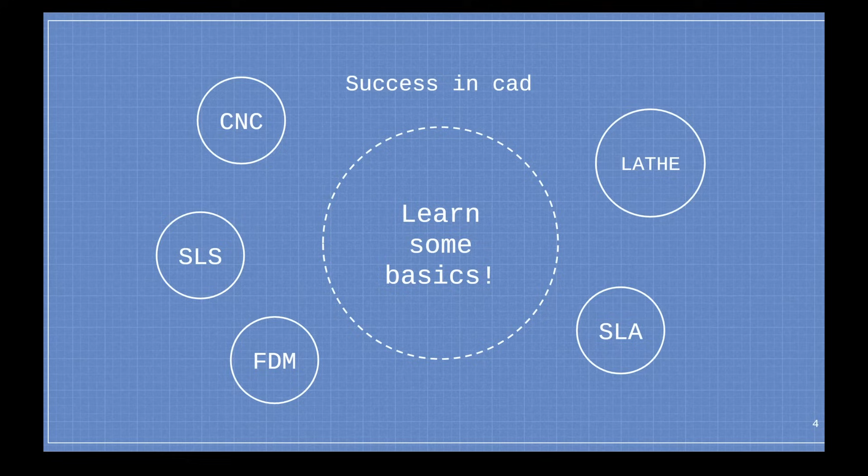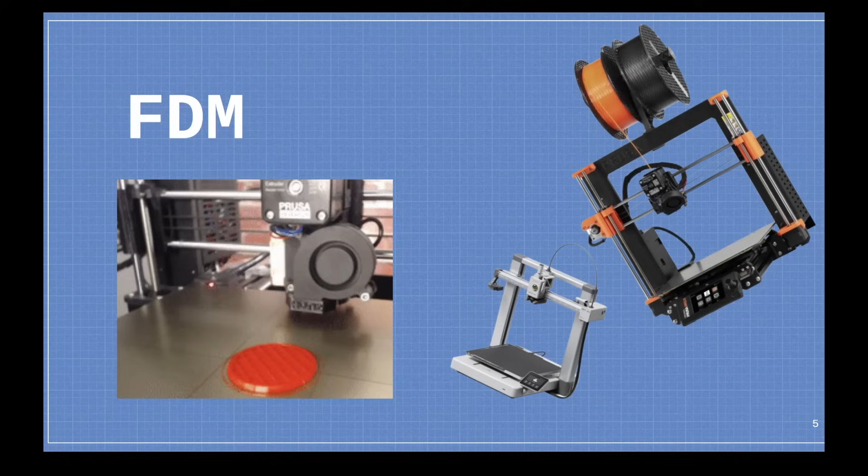However, there are better manufacturing ways if you're planning to mass produce. For FDM, this is your standard Prusa or Bambu Lab, and it just has a layer by layer way of making a part, and the main constraint is that you can't print with an angle less than 30 degrees.

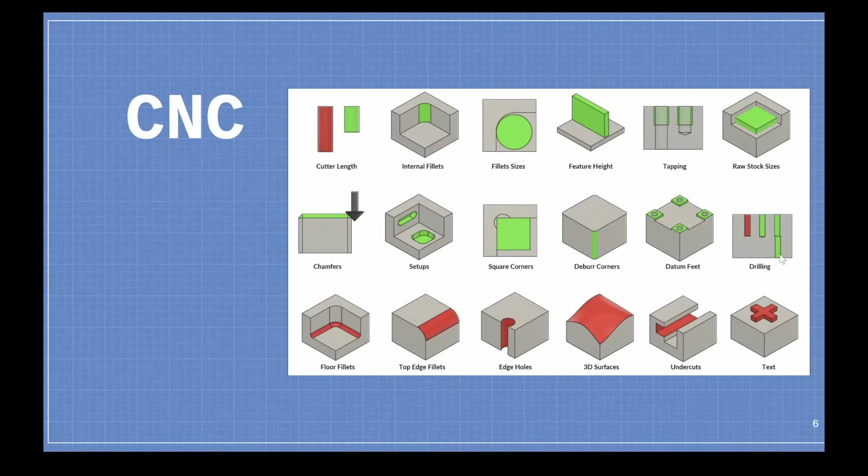Then we have CNC machining, where the main constraints are related to the tool, since in CNC machining you are removing material instead of adding material. Therefore it's very hard to make text, undercuts, 3D surfaces, and fillets. It's also important to know that in CNC machining you can't create a perfectly square corner, since the tool is a drill bit and it's circular.

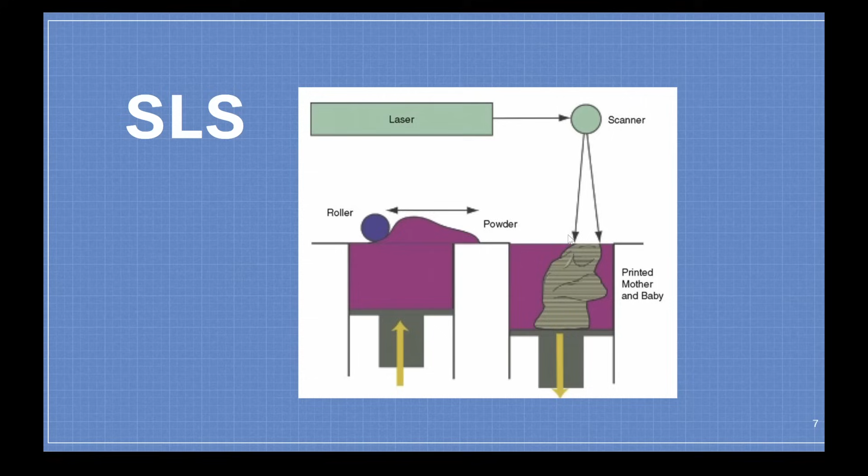Then we have SLS, which is just melting some very fine powder with a laser, and this allows you to print many objects without thinking about support material.

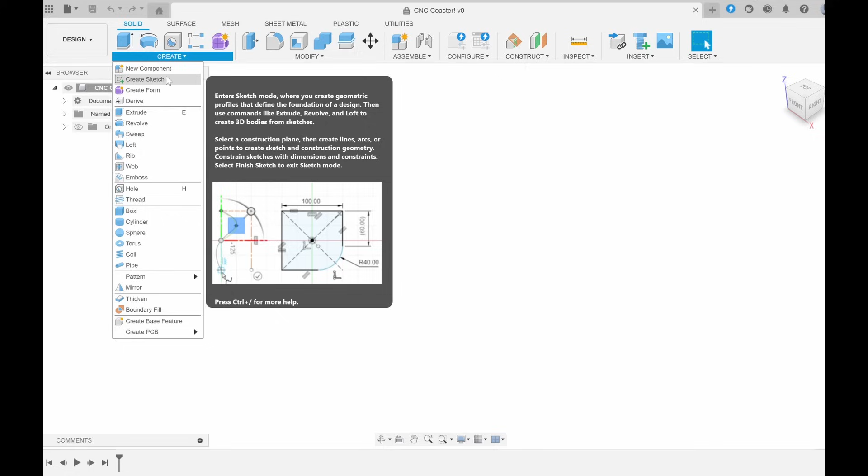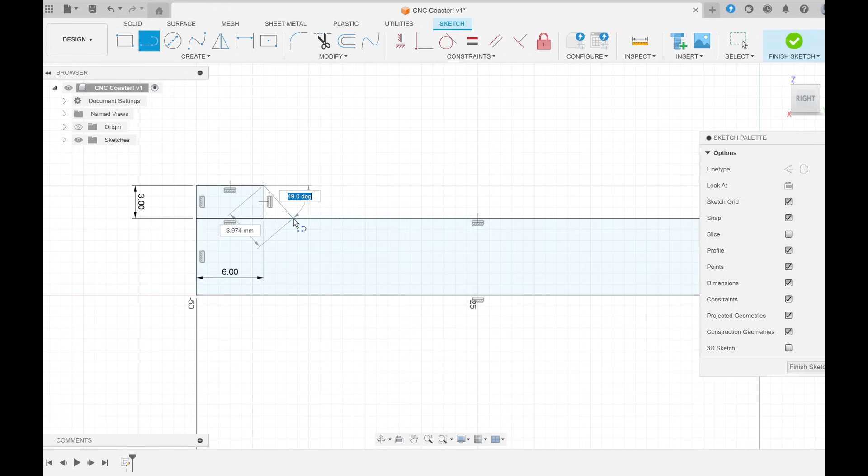So first let's start by just creating a sketch, and in this case, since we're revolving a part, let's make it in the Z plane. Now imagine you're trying to revolve a cylinder. To do that, you just take a rectangle and then revolve it around one of its ends. So let's make a rectangle with some dimensions, and then add that small lip at the end. In this case, I'm just approximating dimensions, but since it's a part with no functional constraints, you can just guess them.

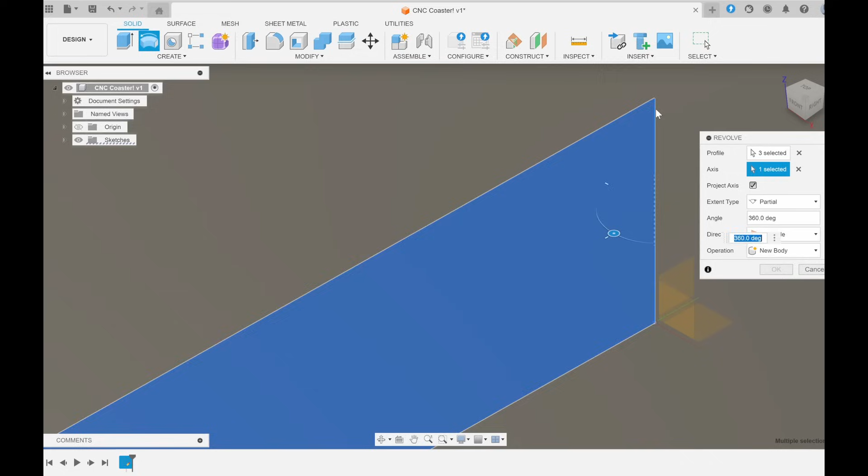And now let's get the revolve feature. Select the sketched parts and then select the axis, which in this case is just the Z plane. And now we have a pretty nice cylinder to start with.

Okay, so now let's add a logo, maybe the open source logo, since it's pretty important in the 3D printing community. In this case, to import a canvas into Fusion 360, I would highly recommend making it without a background, so I'm using an online tool to remove the background.

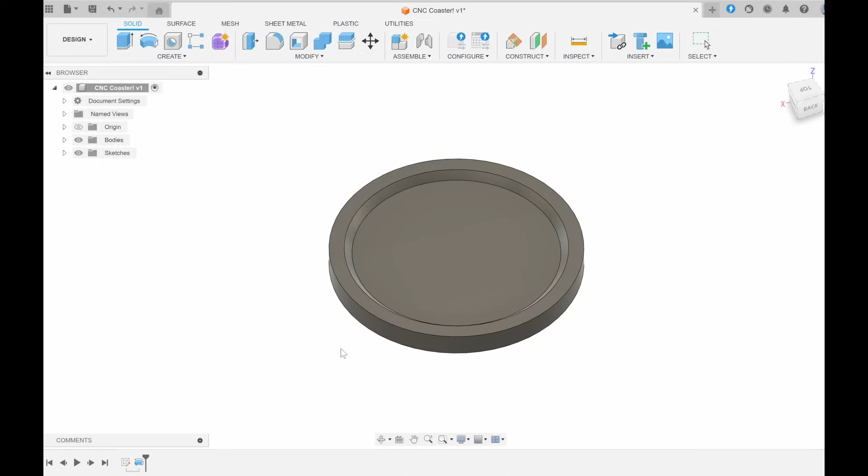Then you can just import it and select a plane. In this case, it's just the top plane, and then we can move the canvas and also scale it. So maybe let's try to center it a bit, and then make it a bit smaller. That looks good.

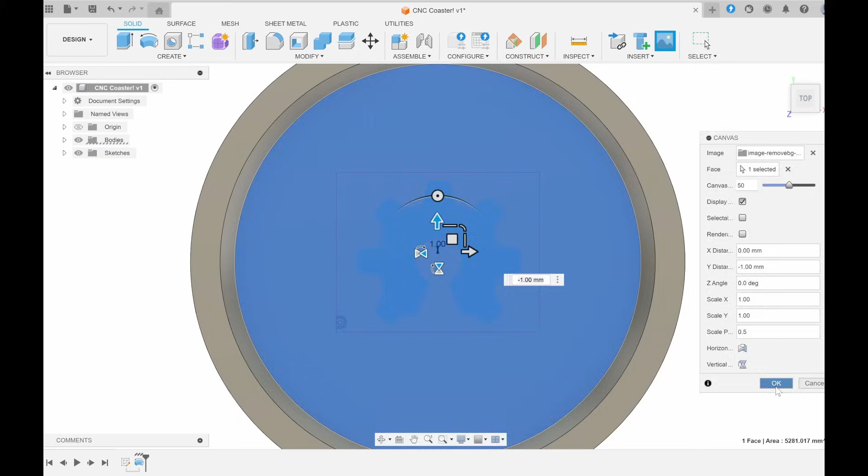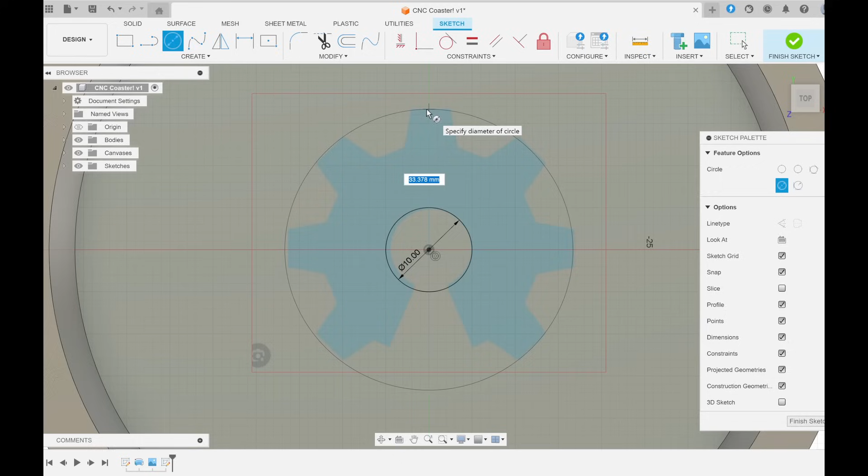Now we have to make a sketch and actually trace the canvas. If this was an SVG file, we could have just extruded it directly, but in many cases SVG files are not very clean, so it's much better to import a canvas and trace it over.

So let's make two circles, which are the boundaries for the logo, then another circle which is just the final boundary, and then we make two lines for the gears.

As we see in this part, there is some symmetry and also some rotational symmetry. So whenever you're trying to trace a logo or a canvas in general, you should try to use the symmetries of the part. This just makes your traced part much more similar to the original one. You can always try to free draw it, but it will never look as good.

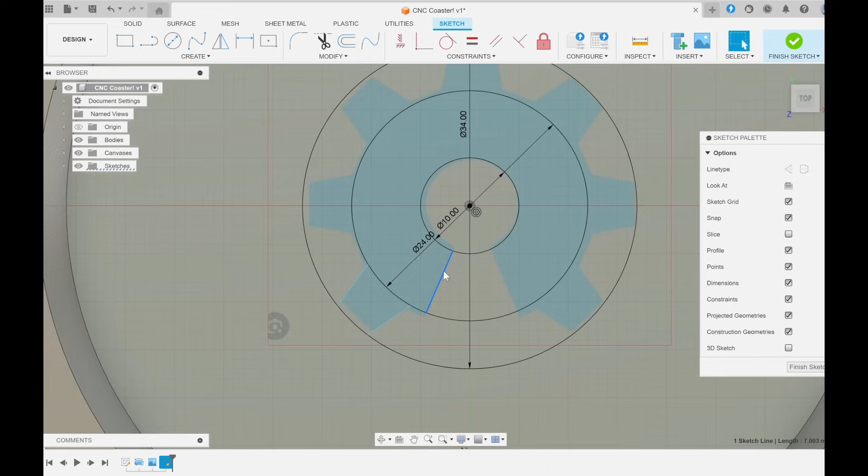So in this case, we can mirror this line here, since it will be the same on the other side. So just select the mirror tool, and the origin as the axis.

And then we see that there is rotational symmetry for the gears. So we just select the two lines, a center point. And then in this case, I see that there are, I think, 7 gears, but it's not full, it's partial, so you have to select an angle. In this case, might be 300, maybe 270. You just guess until you find one, honestly.

Yeah, I think in this case it might be 270. At 270 they line up, so we just have to move the thing on the other side. And now that's done. So the logo is made.

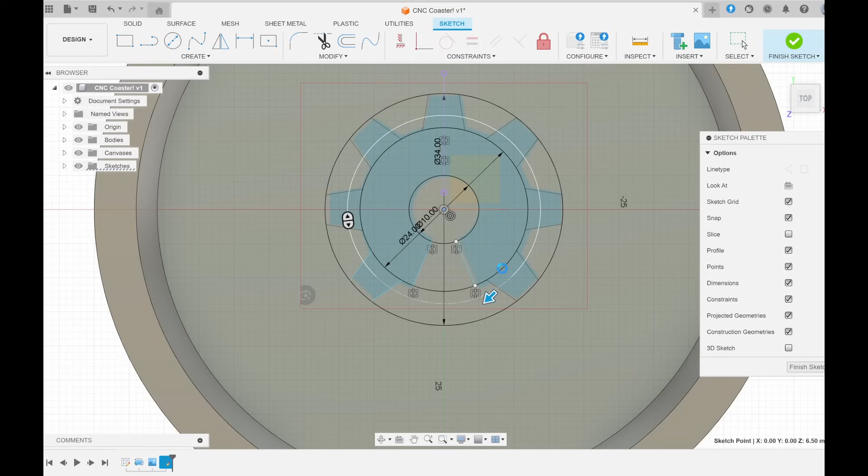Now that we made the logo, we can just finish the sketch and then click on E for extrude. Then just select the sketch and then the outer plane to cut. And now we're done.

But let's make this a bit more interesting, maybe with a pattern. Hexagons are really nice for this, they look great, and as we will see, some people think hexagons are the bestagons. There's actually a nice video from CGP Grey that explains how hexagons are the bestagons. There are bees, and they think the hexagon is just the most efficient way to pack honey. And honestly, apart from all of this, hexagons just look nice. So let's go with the hexagons.

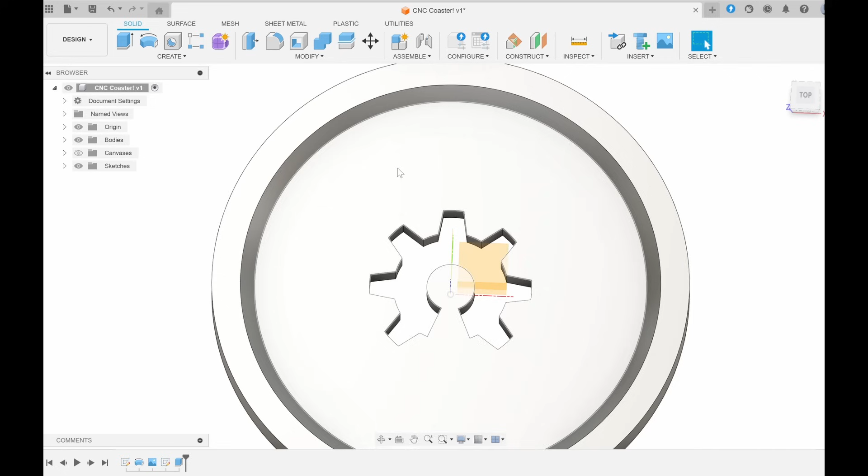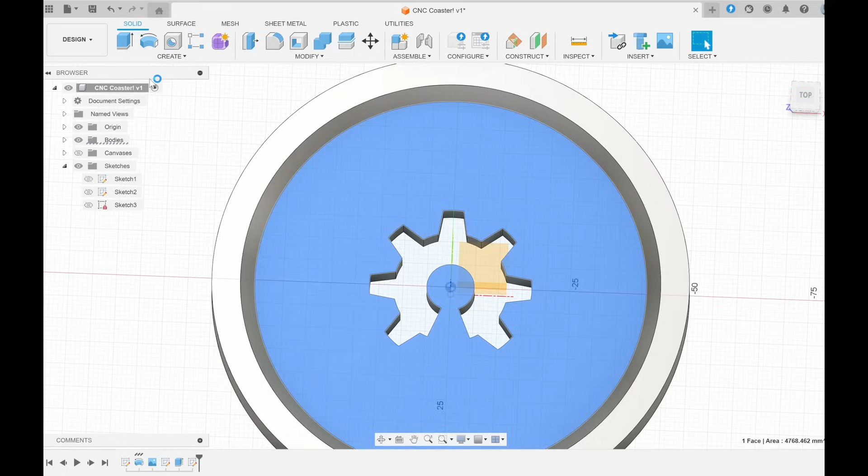To make a nice hexagon pattern, I would suggest dividing it into steps. First, prepare the plane on which you will make the pattern, so create an offset on each of the boundaries and then leave that for later. Then create another sketch, and this will be the sketch that actually contains the hexagons.

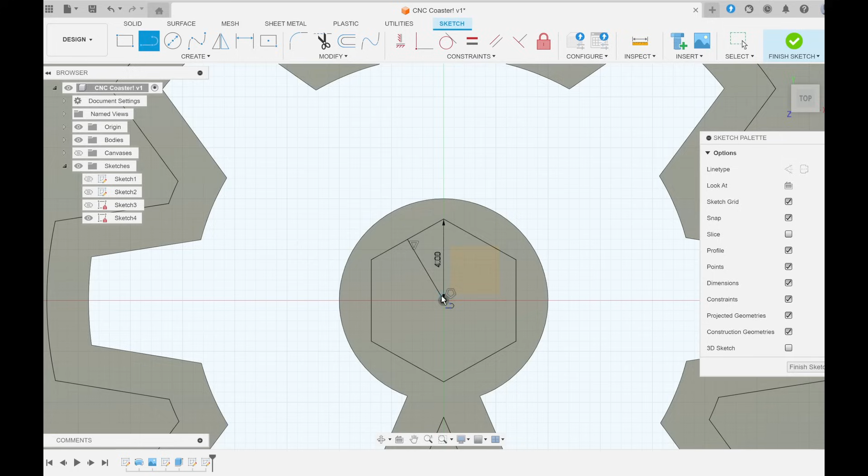So as before, create some offsets, then a polygon, and select a dimension. In this case it's not really important, just select one that looks nice. Then make a vertical line, a horizontal line, and also a line which connects to the midpoint of the first side. We will use these lines as the guides for the rectangular pattern.

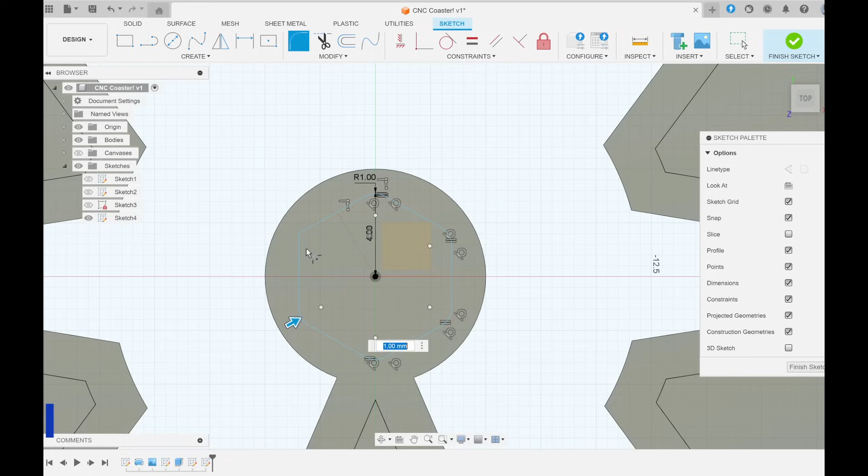So just select the 6 sketches, and then actually it's better to first modify the hexagon rather than after, since after we will need to modify many more instances. So for CNC machining, remember that you can't have sharp corners, so just remember to apply some fillets on the sides.

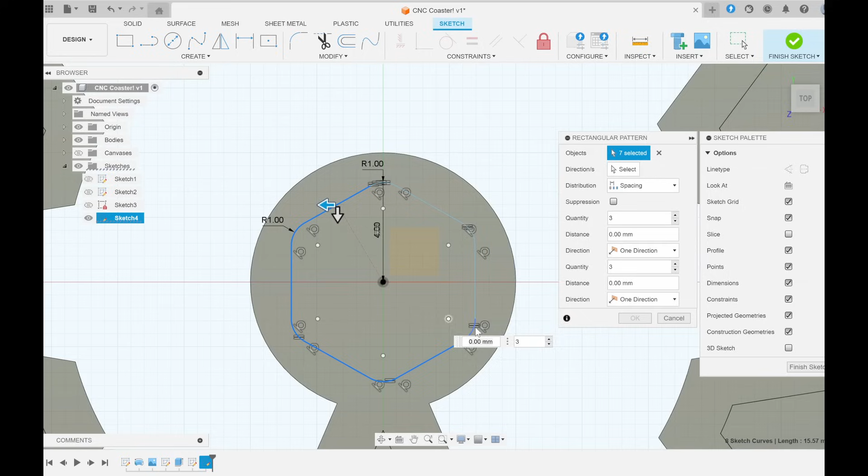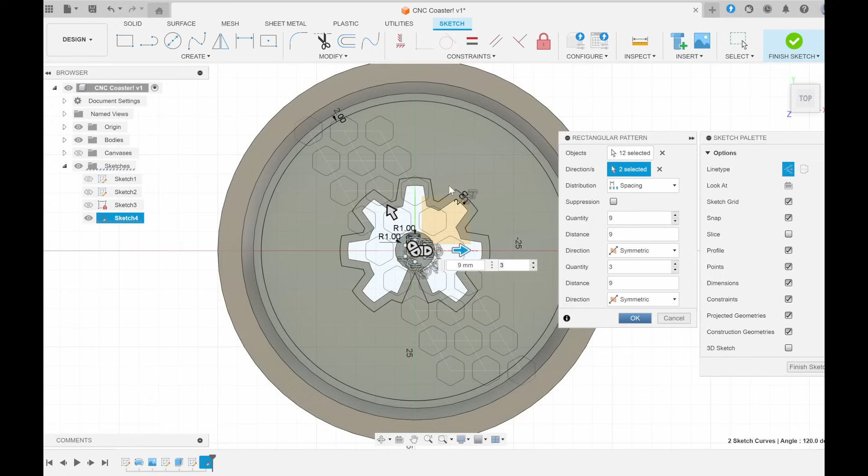Now that that's done, let's select the lines and then just the directions. I always recommend using spacing instead of extent. Then just do symmetric and find a distance which looks right to you. In my experience, it's always about double the size of the hexagon. Then just make the pattern big enough so that it fits on the entire sketch plane.

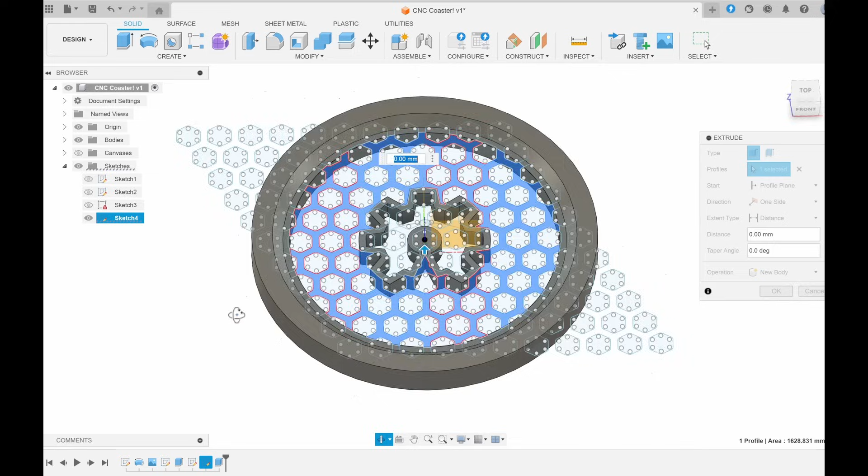Then extrude what we made before, keeping that offset. And then just select the sketch and extrude the things between the hexagons. This is the fastest way to make a hexagon pattern, and as you see, it looks pretty nice.

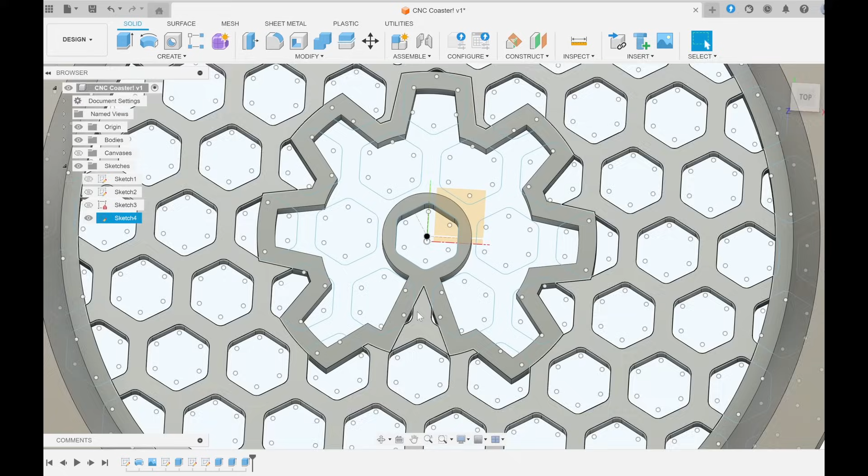It's not perfect. We have to fix some small imperfections, but that's quite easy to do. Let's just go back into the extrude tool and select this, and yeah, that looks nice.

Maybe also that top one. Obviously, when making patterns there is some cleanup, but it's pretty nice.

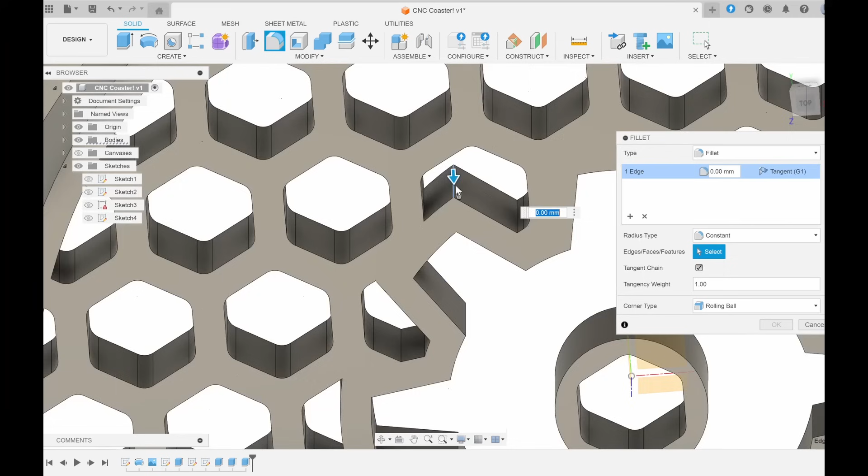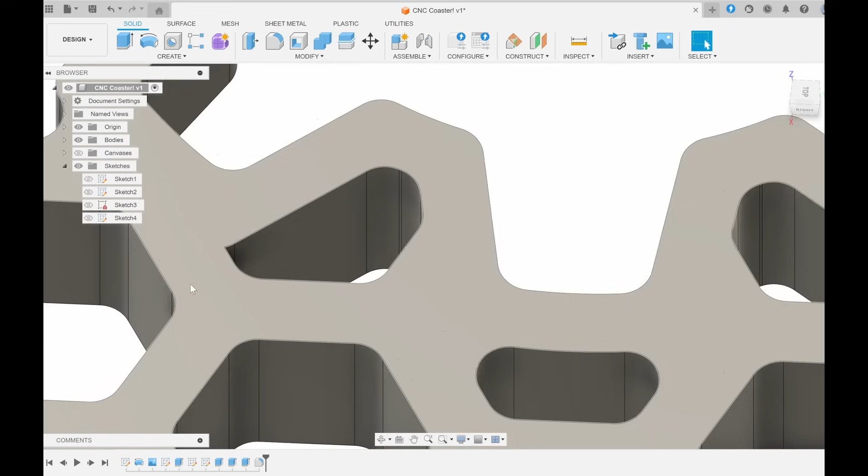Now we have 2 ways to make this more CNC machinable. One is just a tedious way where you select all of the corners and then apply fillets to them. This takes quite a long time, but it's pretty straightforward. Also remember to make the fillets always the same size. And now that's done, and this is ready to be CNC machined.

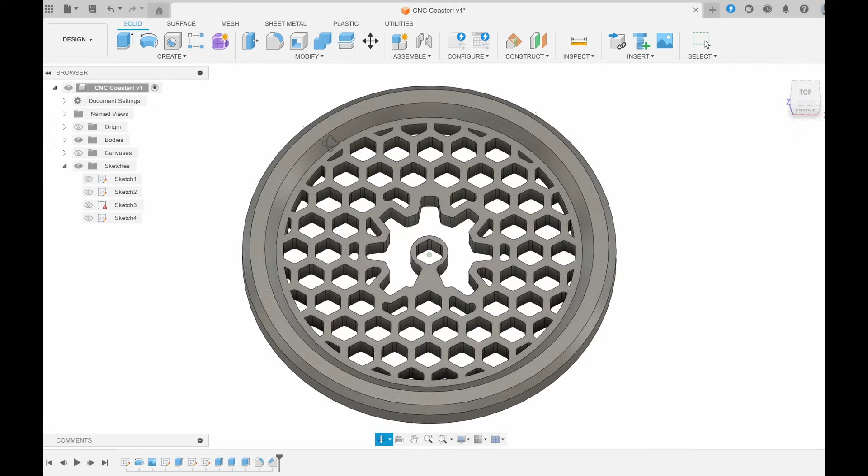Yeah, it looks very nice. It will be quite heavy, but now we have V2. In V2 it's longer since we have to go back to the initial sketch and think more about how we actually made the hexagon.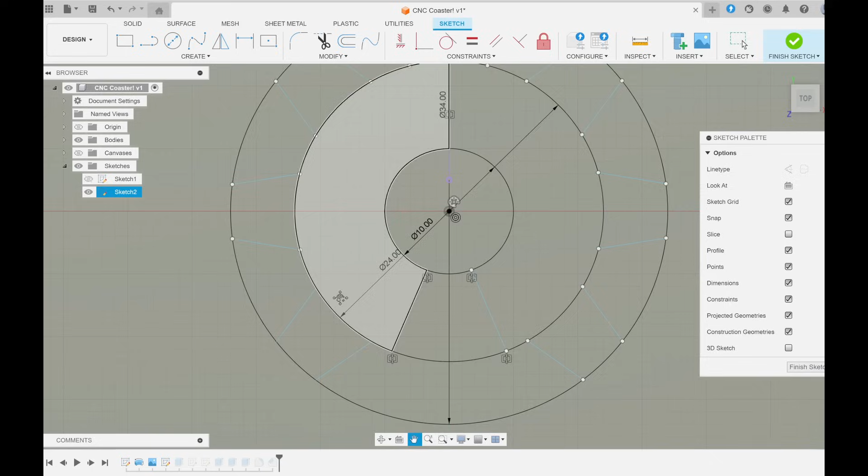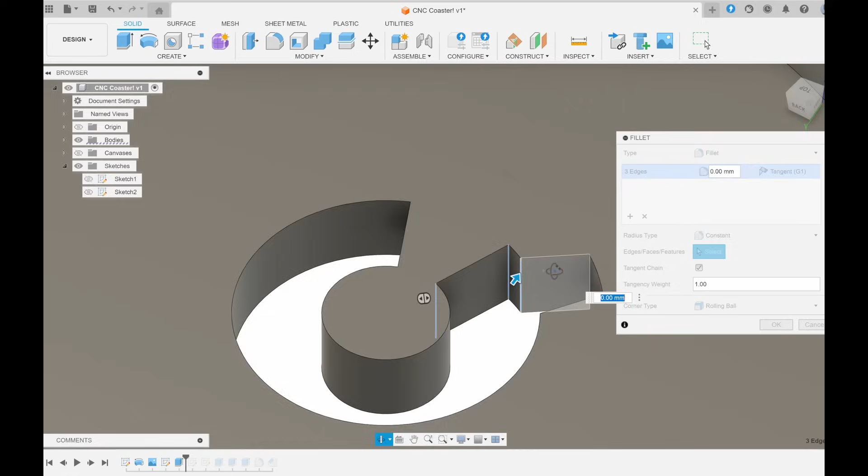So in this case we can just modify how we extruded it. Let's just extrude the center circle and then the first gear. Then let's apply fillets to these few edges, and keep them as 1 millimeter fillets, and then do a circular pattern with the fillets.

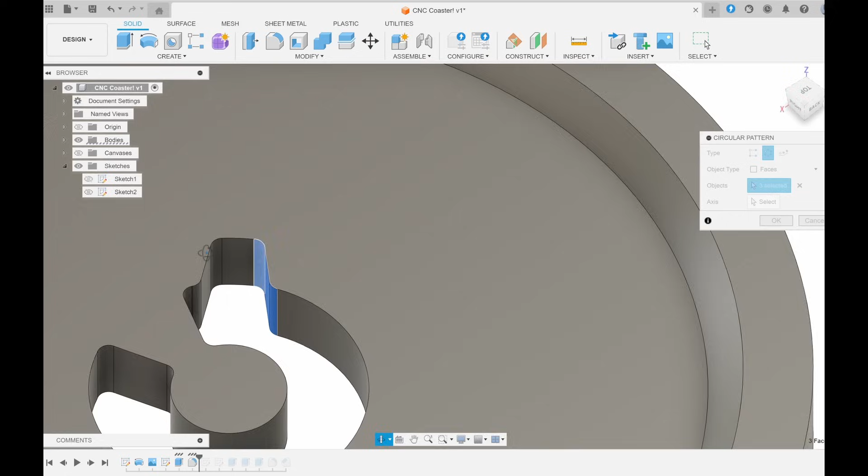Select faces and then just select the faces that you want to pattern. In this case, just select the ones for the gear. Then select the center, and as before, just do a partial one, 270 degrees with 7 instances. And now that's done. It might take a bit more time, but it's probably more fun to do.

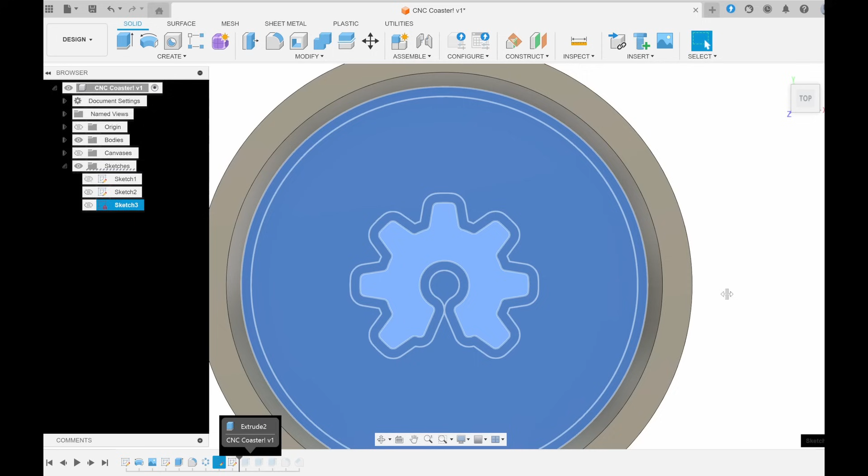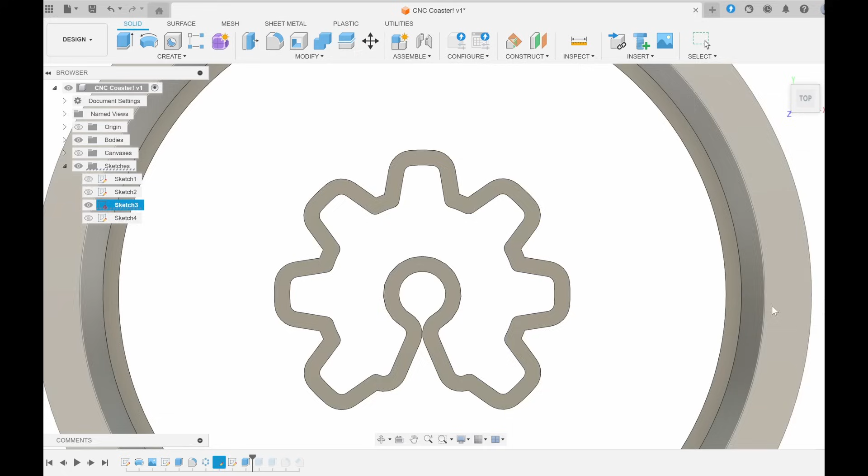Even though this still leaves us with some issues to deal with, like now we have to fix a bit the sketch, since it might get messed up. Apart from that, it looks pretty good. We go on and then just fix if there are any other issues, but it seems okay.

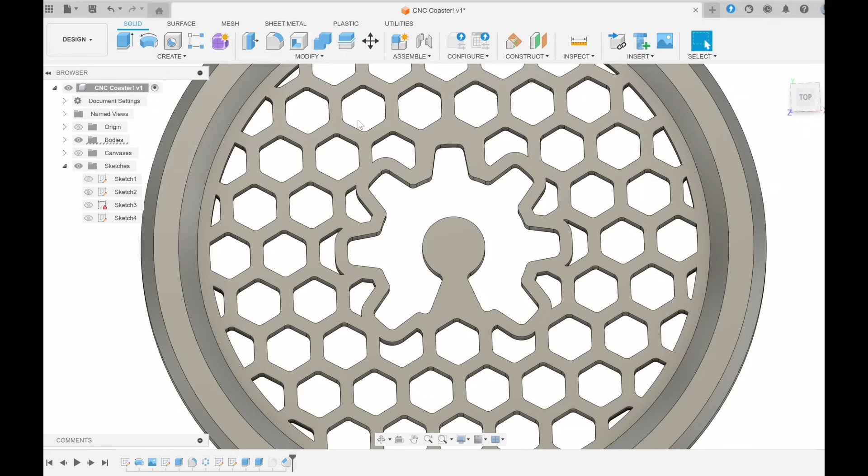At this point, unfortunately, we still have to select the outer ones, since you can't really apply a fillet to a pattern before you make the pattern. So now we have to do it for these outer ones that intersect between the pattern and the actual open source logo.

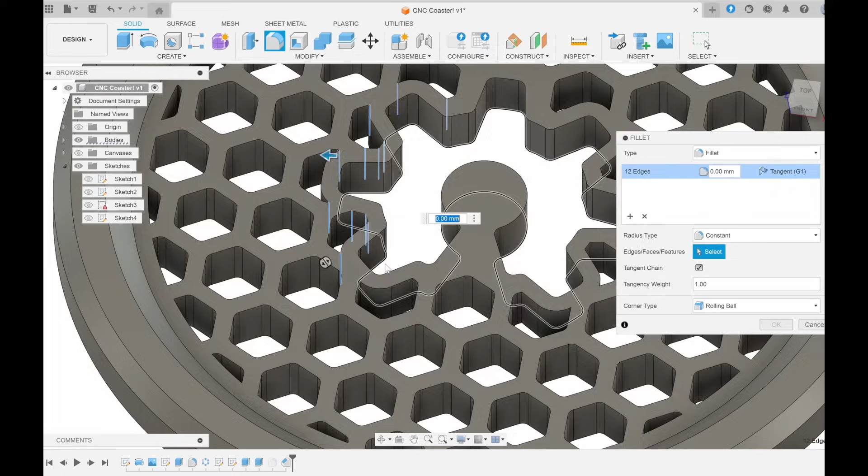Also, a tip: when trying to select an edge, Fusion usually allows you to select it even if you don't see it. You can just try to hover it, and it usually assumes the one that you want. Now let's repeat the same step for the other side. And then we're done.

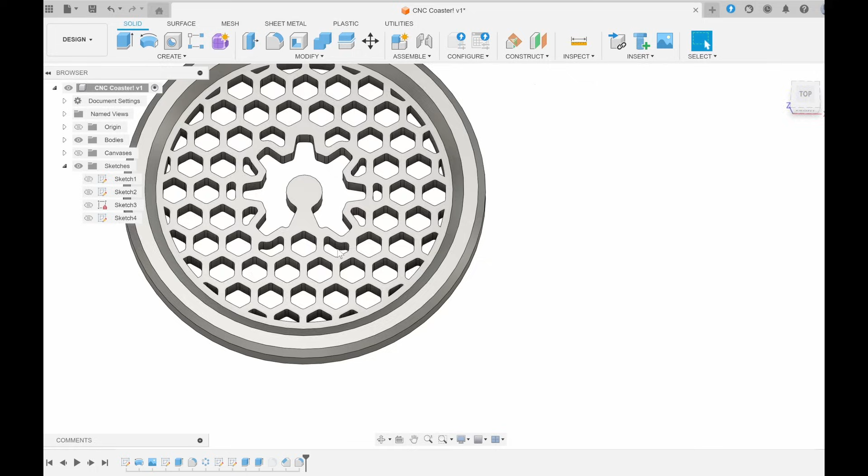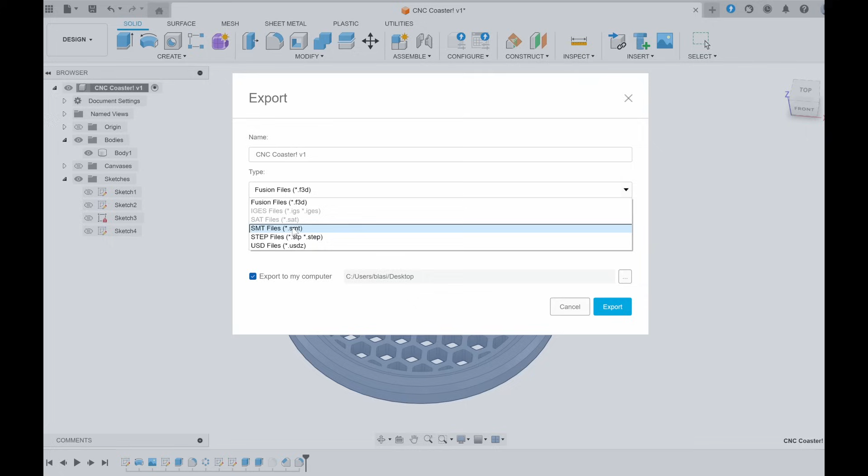Now we can just select the body, then save as mesh, and in this case we can save it as a 3mf file if we want to 3D print it. But since we want to machine it, it's probably better to save it as a step file. So just go on to export of the main part, select step, and that's done.